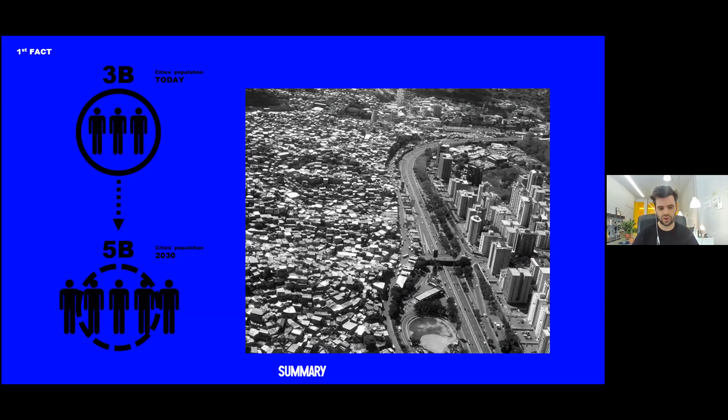It means that we'll need to define strategies to accommodate this population faster than ever. Otherwise, a lot of cities will just collapse. Otherwise, architecture is not taking a relevant role in this process.

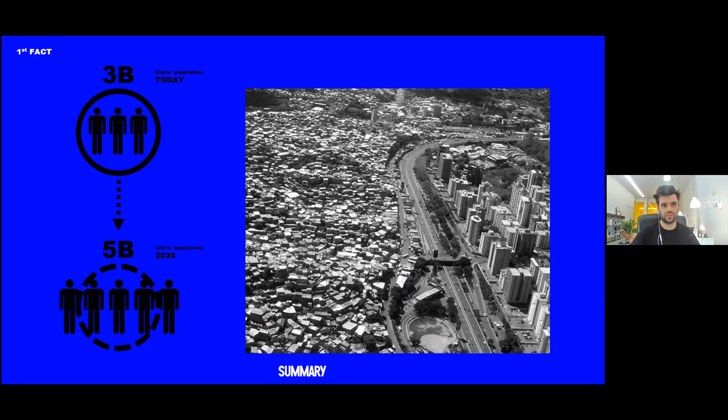So I would say that these two worldwide facts, the people moving toward the cities and the growing need for immediacy, seem to be unrelated, but there's something in common. They both set up a call for pragmatism, and they both place the same challenge to architecture, which is time and physical resources optimization. And from the very beginning, we knew that it would be our focus. That's why we are so obsessed with standardization, with prefabricated and modular architecture.

But I would say that besides these two worldwide facts, there's also our personal experience, our empiric perception. It was Portugal in 2015, the year we created the studio, so 5 years ago. It was a post-crisis country with lack of money, very little public investment, and quite limited resources. So this resources optimization sense was not just a choice, but also a need in a country like Portugal. So we just worked with the context we found. And our first project shows it quite well.

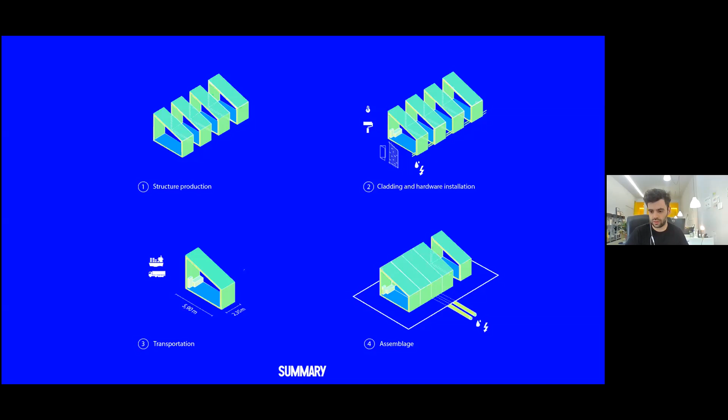So in this same year, 2015, a Portuguese concrete company specialized in prefab and offsite construction commissioned us to develop a new building system that should be cheap and easy to produce, to transport, and to assemble. This was our answer. We call it the Gomos system. Gomos is the Portuguese word meaning the slice of the orange fruit. We created this modular system based on concrete units, these concrete rings, and we designed not just the system itself, but also the industrial procedure to make it possible. And that's how it works.

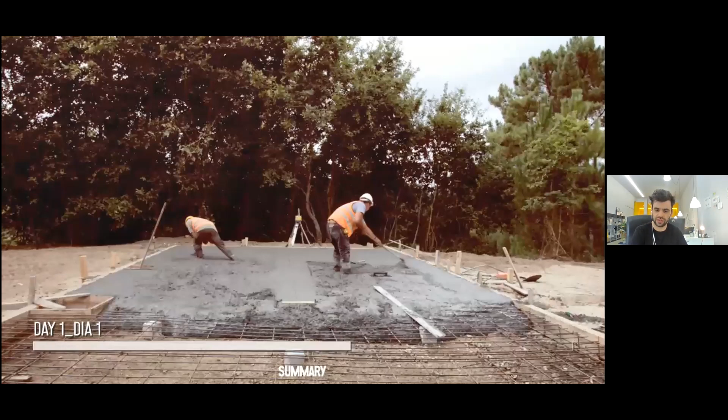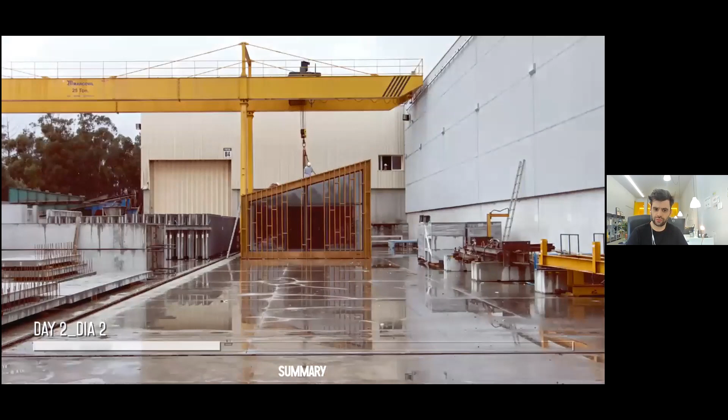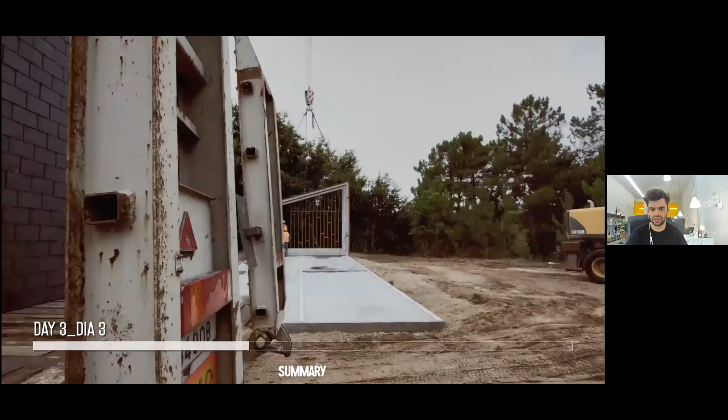So this is our prototype, our first experience with this system. During the first day, we just built this foundation slab with concrete with special components to dry within 15 hours. During the second day, we started the transportation of the modules. As we can see, the building is ready in the factory, including all the electricity components, all the fixed furniture pieces, also the insulation layer. During the third day, all the modules are in the building site, and we just need to place them and to connect them.

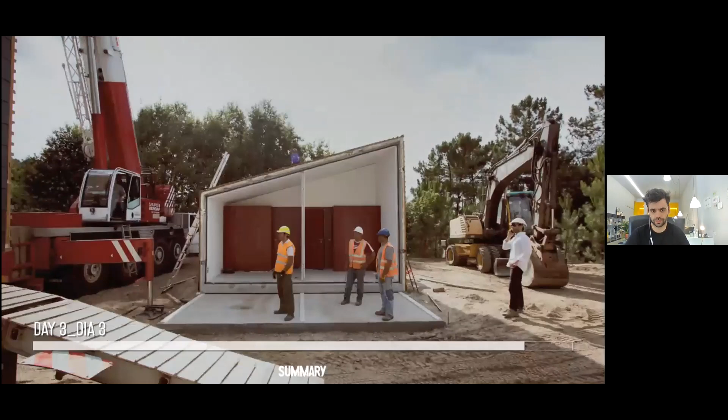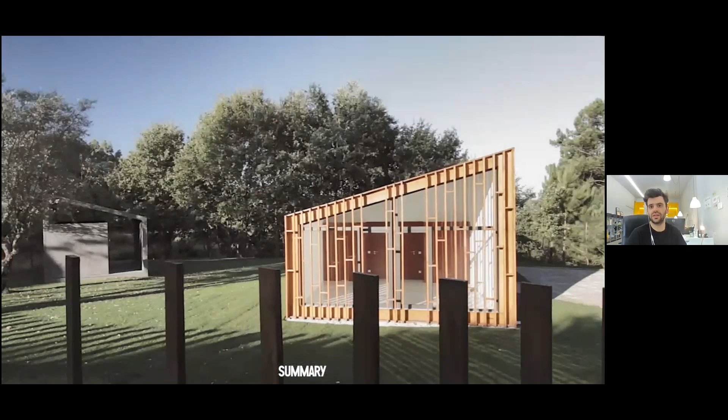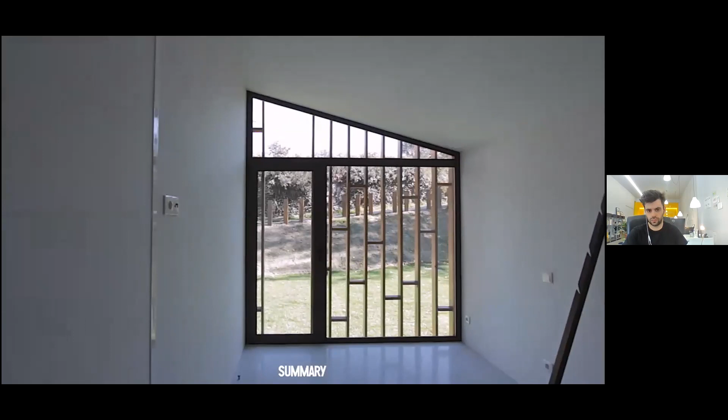So this process takes 3 months in the factory. It took us 3 days on site to mount the building, within a period 6 times faster than our country's building rate average, not compromising its constructive or structural quality. So this is what we mean when we talk about optimization. So these are some photos of this prototype. It has a special taste for us as our first building experience. And of course, it helped us to materialize our approach.

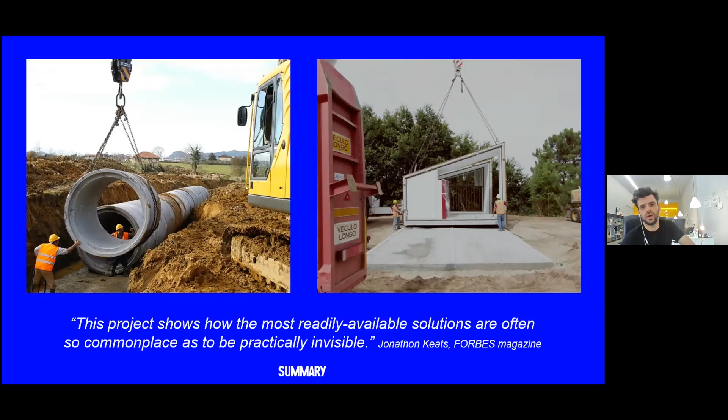Anyway, it's important to remark that we didn't just invent this. We took the idea of the old sewer pipes normally used for water drainage, and we just redesigned it in order to make it habitable. So I would say that these sewer pipe modules and this Gomos system are quite different in use, but quite the same in structural or constructive terms. That's why I love this sentence from Jonathon Keats for Forbes magazine: this project shows how the most readily available solutions are often so commonplace as to be practically invisible. So sometimes our function as architects is not just to invent, but also to unveil these hidden solutions.

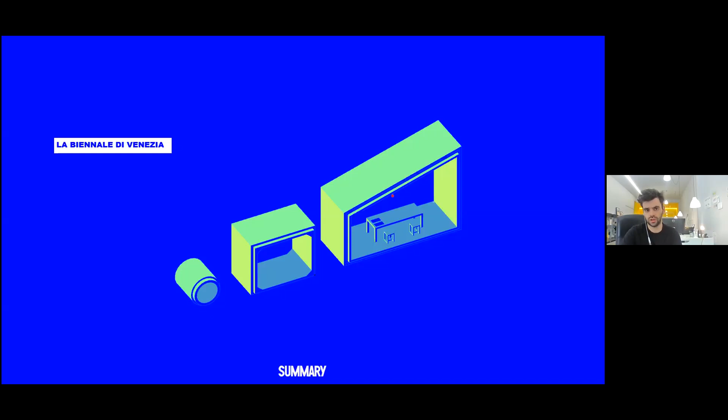And it takes us to the Venice Biennale 2016. It was this idea of transposition from an infrastructural system to an architectural system that we were invited to show in the Venice Biennale. This is our installation called Infrastructure Structure Architecture, and the idea was to make straight clear what was the concept and what was the result behind this building system. So we wanted to show how these pieces are brutally different in shape, they are brutally different in use, but they are quite the same in constructive terms.

And reinforcing this idea of transposition, of reinventing, here's a project 70 years older than ours, using the same concept. I mean, structural slices fully ready from the factory. They use steel, we use concrete, but the concept is quite similar.

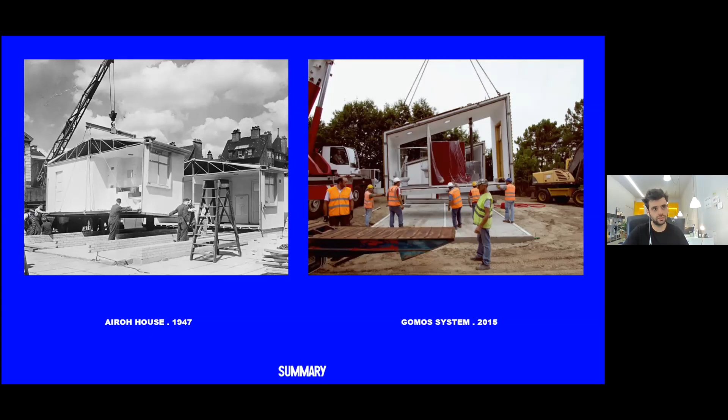And another case, this is the Zip-Up House from Richard Rogers. Again, it is not innovation at all. It is all about reprocessing and adapting existing solutions. And the history of prefabricated architecture is being built with cases like that. I mean, similar solutions being applied by different architects, solutions that failed, and then sometimes decades later they are copied or recovered by someone else.

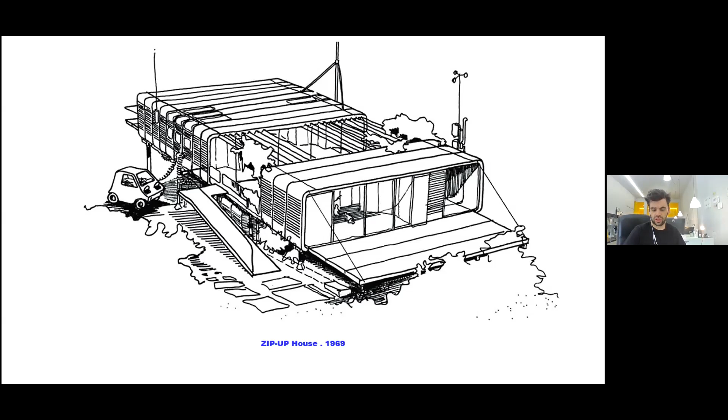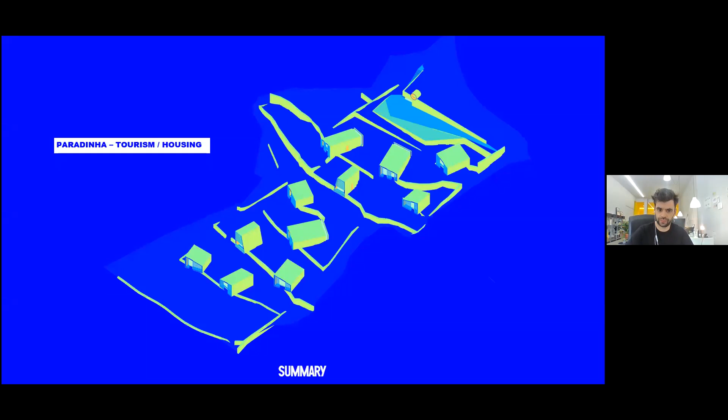And after the Venice Biennale, we got some commissions to develop several works with our Gomos system. This is one of them, mixing tourism and housing. So the client came to us because of this hilly terrain with this kind of topography. It would be almost impossible and also very expensive to assemble these construction yards for the traditional building. That's why he wanted our modular system.

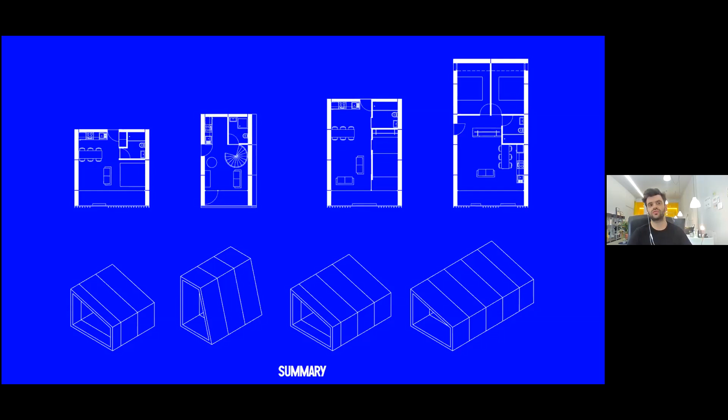At the very first moment, the commission would be to distribute several rooms over the hillside. We proposed not rooms, but small houses, so that some of them are able to work as full-time houses and not as tourism units. So mixing these two programs, tourism and housing, we guarantee that this complex will not have a seasonal use. It will be used the whole year and not just during the vacation period. And frequent use normally means frequent maintenance and frequent security of the area. So the client understood and accepted this suggestion.

And we also took this project as an opportunity to start a new experience with this system. So in order to optimize even more the production, in this case, we tried to concentrate all the technical installations, I mean the water, the electricity, and the climatization, in just one module. And we bring it to the other parts of the house externally. So this technical module requires more specifications to be produced, but the rest can be produced automatically with very little human intervention, taking half of the time compared to the others.

And the next step was the placing of these units over the hillside. It seems quite random, but it is mainly related to the ground pressure. So due to this rugged terrain topography, it would be difficult to build normal foundation slabs. So with the geotechnical test, we determined the parts with the best ground pressure. They are marked in blue in this image. So within those areas, the natural ground is strong enough to install each unit directly, without any foundation slab. And of course, it is easier, cheaper, and also less abrasive for the natural soil.

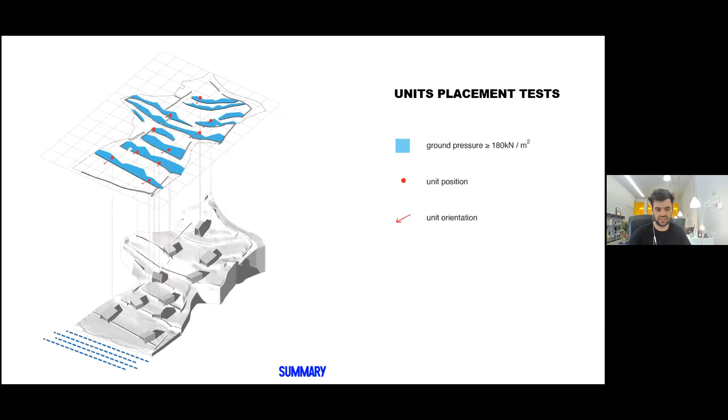And then within those blue areas, we tested different positions and different orientations. The goal was to place the units as separated as possible to guarantee the privacy of each one, combining it with specific orientations to avoid visual barriers. So it looks like a Tetris game until we get to this. At this point, each unit has a view of the landscape and the river, and these modules are currently under production. Some of them are already being assembled.

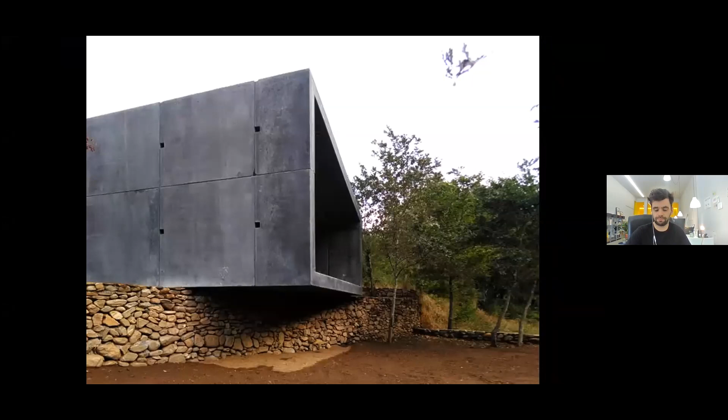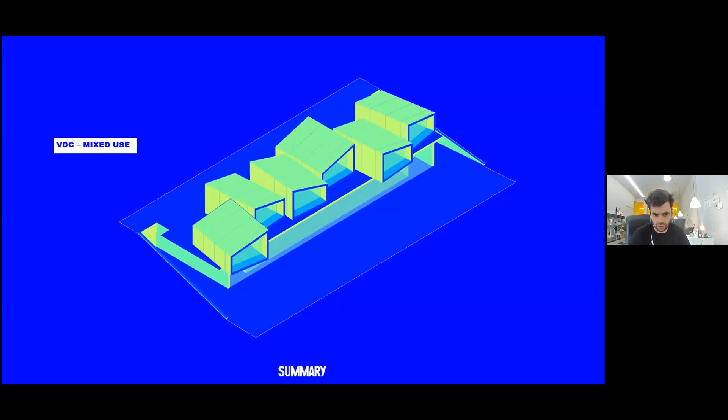And this is another project using, again, the same system. This time it is a mixed-use building with an upper floor with 6 small apartments for low-cost renting and a multifunctional space on the ground floor in, let's say, direct contact with the public area.

So we tried to take this multifunctionality to the limit. All the partitions on this ground floor are done with removable panels. So we can create new compartments, or we can leave the whole floor to work as a very big open space. So this area is changeable over time according to the program at hand.

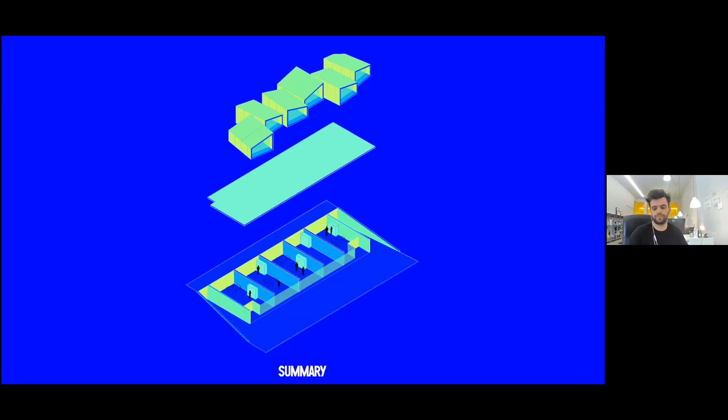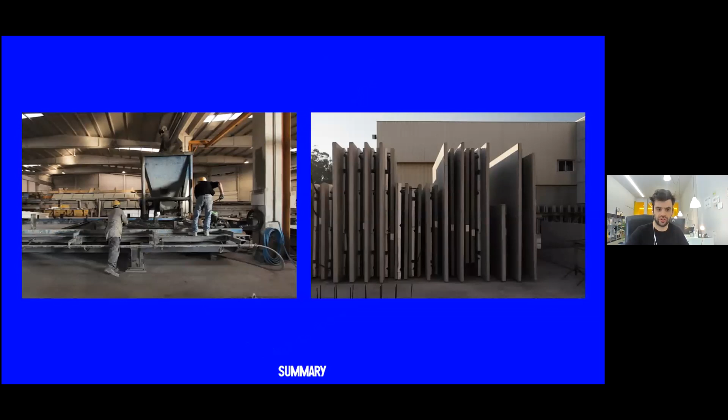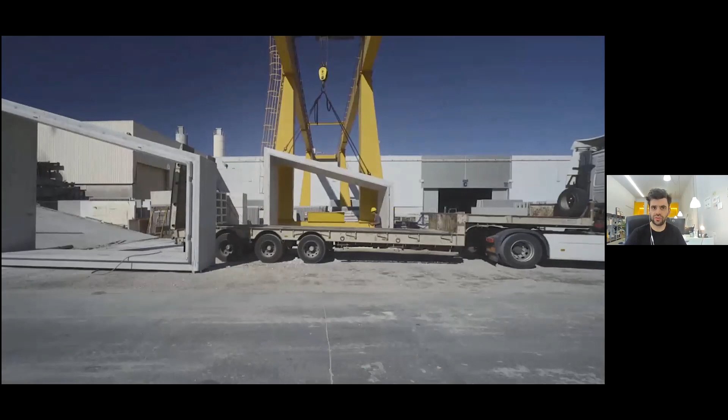All the structure is offsite, made out of prefabricated concrete. It is produced and stored in factory. And then when it's the right moment, we just assemble it in the building site in a very quick and clean way. So we use this panel system in the ground floor, similar to the Soviet systems, and the Gomos system in the upper floor, both with the insulation inside the walls.

These are some videos from the building assembly process. And now the final photos, it is our latest project, so it is still quite fresh for us. As you can see, this frontal facade facing the public space is quite open. The back facade, the entrance for the houses, is more closed, more private.

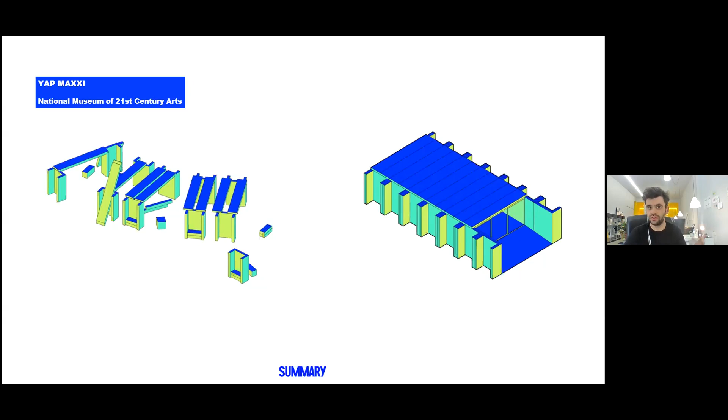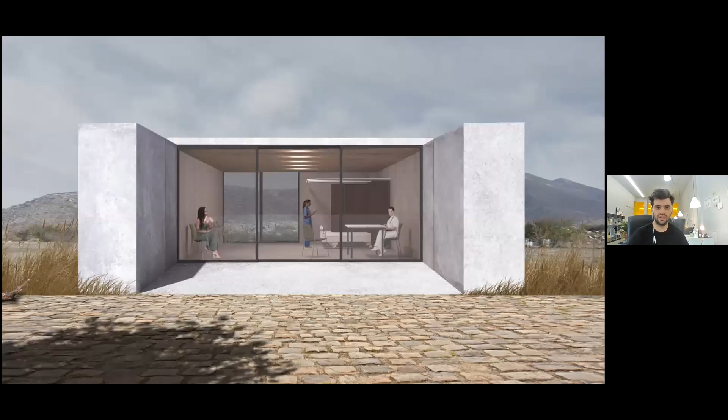Our proposal as an installation was kind of concrete pergola functioning as a temporary and shaded external space to host their activities. The formal appearance of this installation corresponds to what it really is, a provisory stage of a few concrete pieces that would become a building soon. Actually, it does look almost as a building site. And using these same pieces, it will be possible to raise this permanent building, somehow recycling the energy, the effort, and also the money and the material that we used previously in this temporary installation.

And another case, this is for the Gonçalves Museum Foundation in Portugal. This foundation promoted a competition for a modular and itinerant pavilion to host their art exhibitions in different locations. So it should be flexible and it could assume different dimensions from 200 to 600 square meters, needing to be repeatedly assembled, disassembled, and stored. So we defined 2 main principles to design this project. The first one is to guarantee the structural resistance of the pavilion after several assemblies. And the second one was to find the cheapest solution for the pavilion storage. When the pavilion is not in use, it shouldn't represent any cost.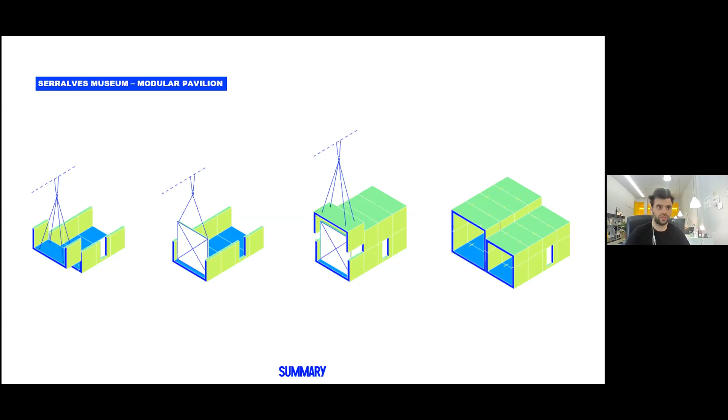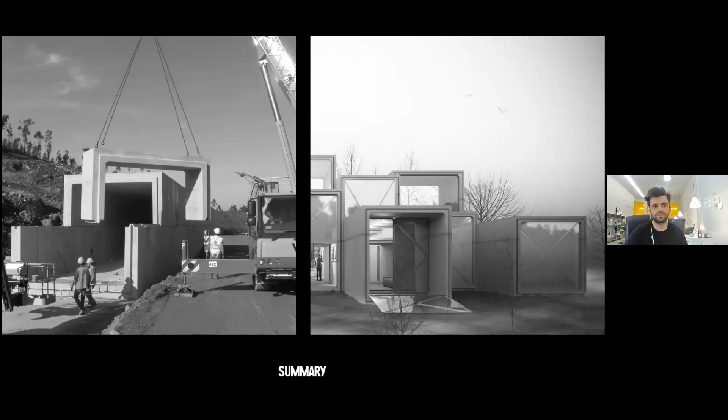So, to ensure this structural resistance, instead of trying to invent a new modular building system, which would be not verified and not tested, we just reused again an existing system. So it is the same strategy we used before with the GOMOs, but in this case with a different shape. Each one of these modules is divided in 2 pieces. So we have a base and then we have a top. With this we also divide the weight, making it simpler to assemble and to transport. And this is a proposed solution. All these pieces are to be produced off-site and just assembled in-site. And the final building can vary in terms of dimensions simply by adding or removing these modules.

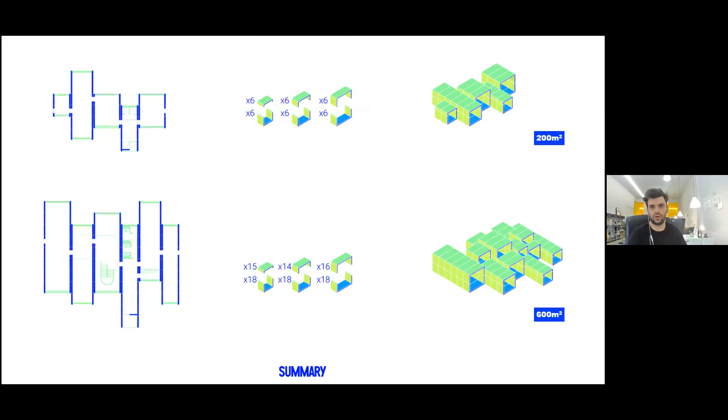And finally, about the storage, we propose these modules to have different sizes, allowing them to be stored inside each other, let's say as a matryoshka concept, occupying a reduced space. And considering the rough composition of the modules, they are mainly made out of concrete. They are able to be stored anywhere, including in the exterior, not needing a warehouse. We said they could just store them in the gardens of the foundation, so reducing the storage costs to zero. We got selected in the first stage of this competition, and we are among the 3 shortlisted projects and waiting for the final decision.

Okay, I'm almost finishing here, but let's go back to the beginning of this talk. These two facts, I mean, the increasing of the global urban population and this growing need for immediacy, they are changing the world, and they certainly demand rapid and more efficient architecture. And in generic terms, these requirements are also the main struggles of off-site and prefab architecture. However, I would say that most off-site attempts failed, as they don't reach the expected rapidity or affordability.

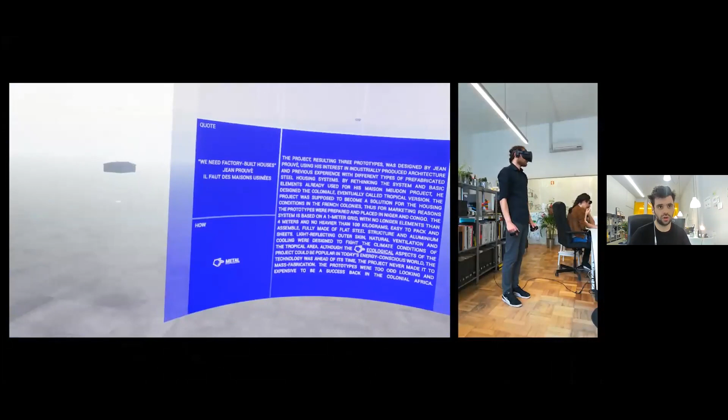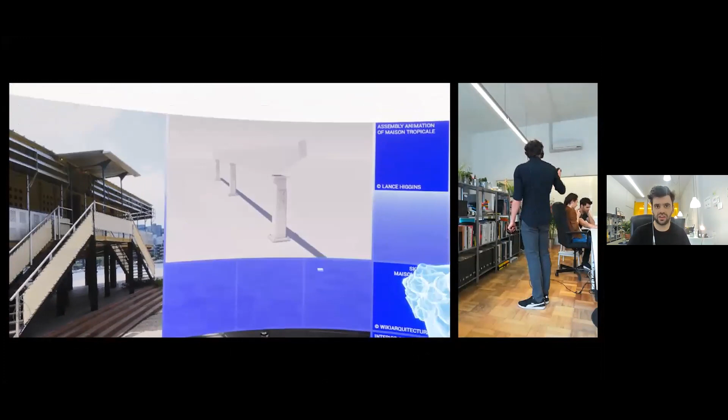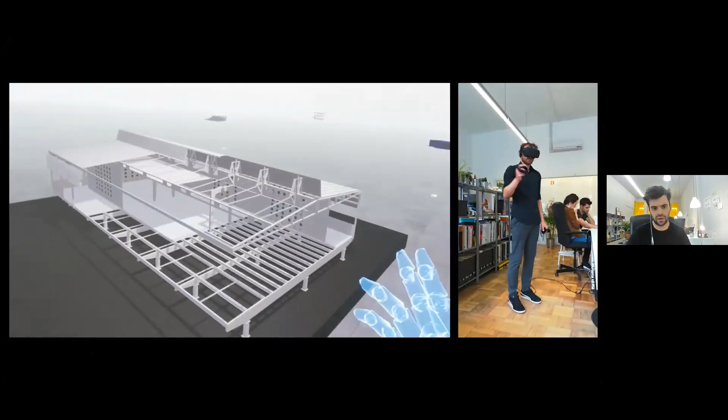And this is how it works. It is a collection of buildings and building systems that we consider significant in this historical evolution of off-site architecture. So the goal is to create this radiography of the different stages of this evolution. And we present the classical triptych of any architectural exhibition, let's say models, texts, and photos, but we do it in a virtual environment. So it is almost an immaterial exhibition.